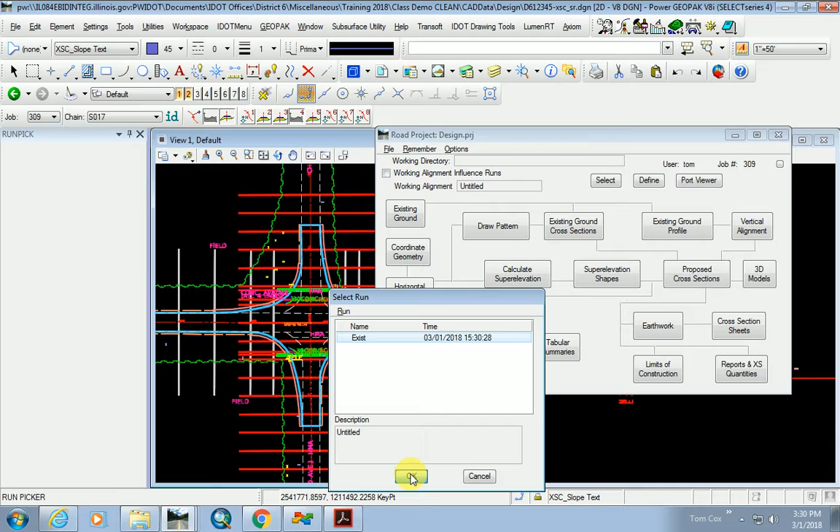So we're going to bring up Project Manager. Remember, we used existing before. This time we're going to say proposed, even though it's existing pavement. And then I'm going to name this existing. And all this, you're going to find everything's the same. It's asking you questions and you're giving it the answer.

And so where is your cross-section file located? So I'm just going to point to my mainline cross-section file. This tolerance, that would probably be fine. We were told at one point in time to switch that to 0.01. I always do. I assume it would probably still work with 0.1 though.

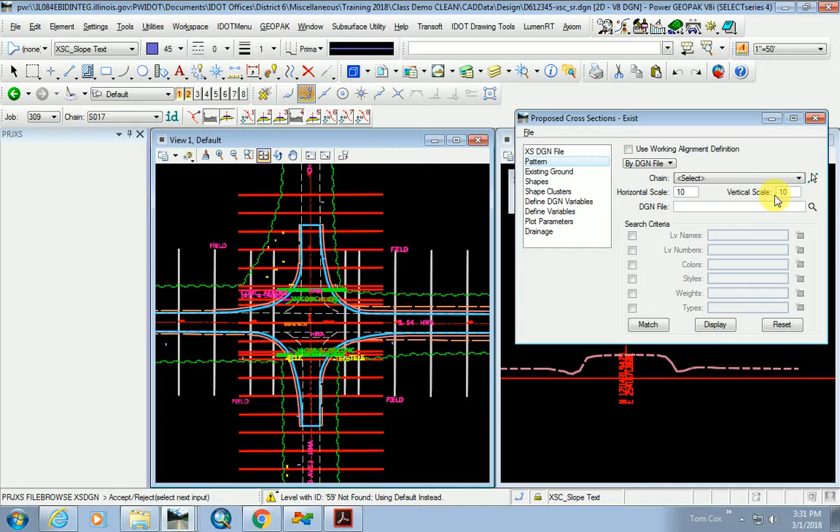Okay, pattern. Select my chain. Give it that 1-to-1 ratio. Path out to where the pattern lines are located in the geolines file. Toggle a few of these search criteria. Hit match. I match up my pattern lines. Next is existing ground.

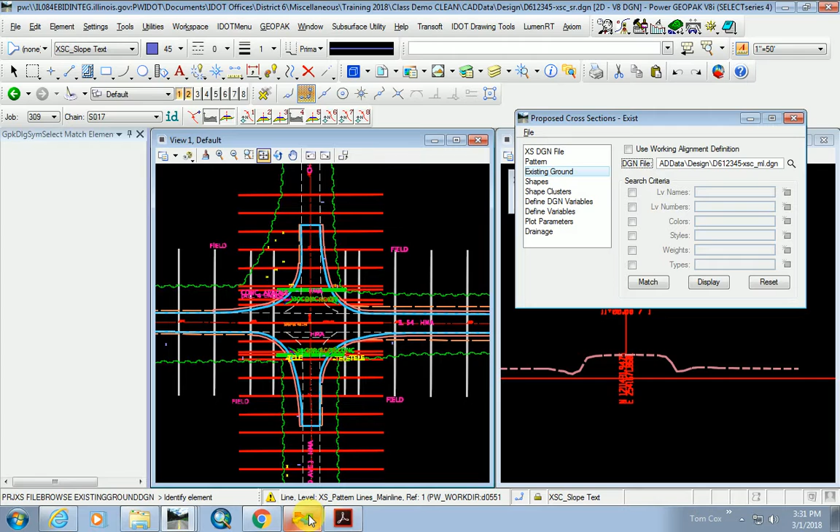Okay. I'm going to path out to my cross-section file. Am I sitting in that? No, let me jump into that file. Mainline. And it just needs to know what level I placed my existing ground on when I processed the existing cross-sections. Okay, so I'm going to toggle a few of these, hit match.

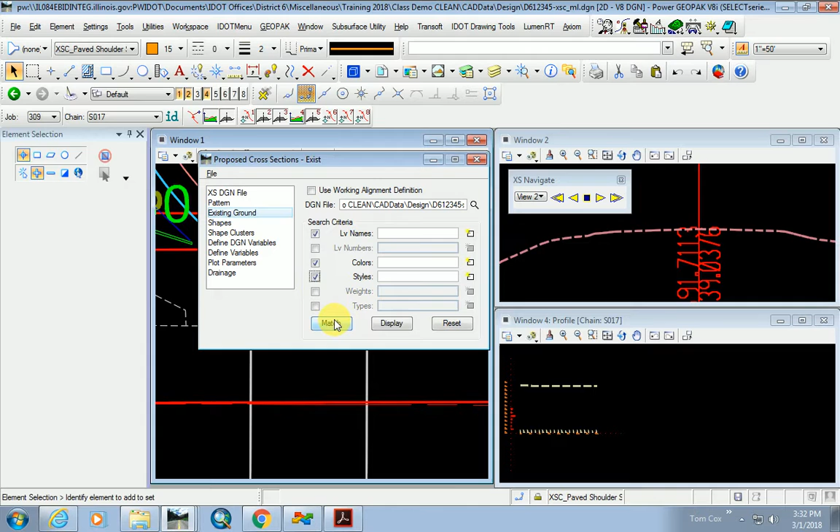And then I'm going to get to shapes. Now we'll talk about proposed shapes later. Shapes are what determines what the cross slope of the pavement is going to be. So Geopak will actually calculate, if you have curves, your super elevation and your transition. And then the way it communicates it back is through what appears to be a shape. It looks like a MicroStation shape, but it has cross slope information built into it and elevations.

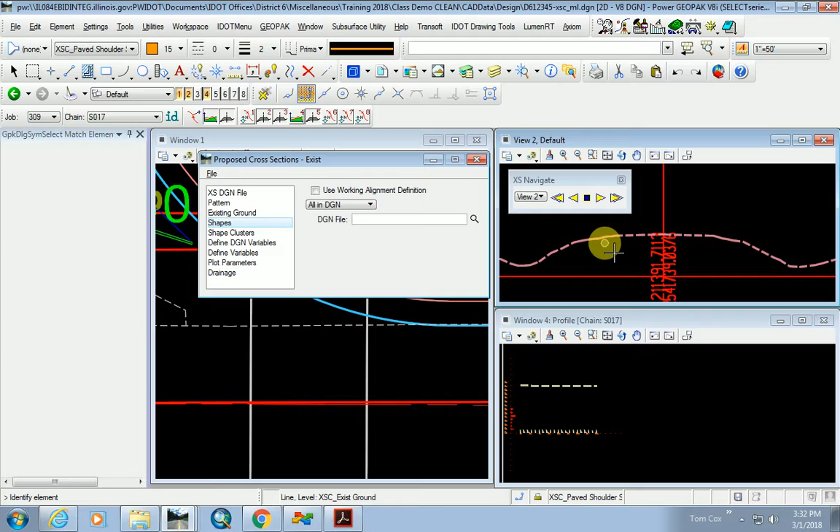But for this particular purpose, you know what we're doing here. We're drafting in the existing pavement automatically. So there are no shapes for that. So we're going to say shapeless. And then these shape clusters, again, we don't have shapes, but we're still going to be able to use this dialog. And we're going to say, there's my chain, there's my profile.

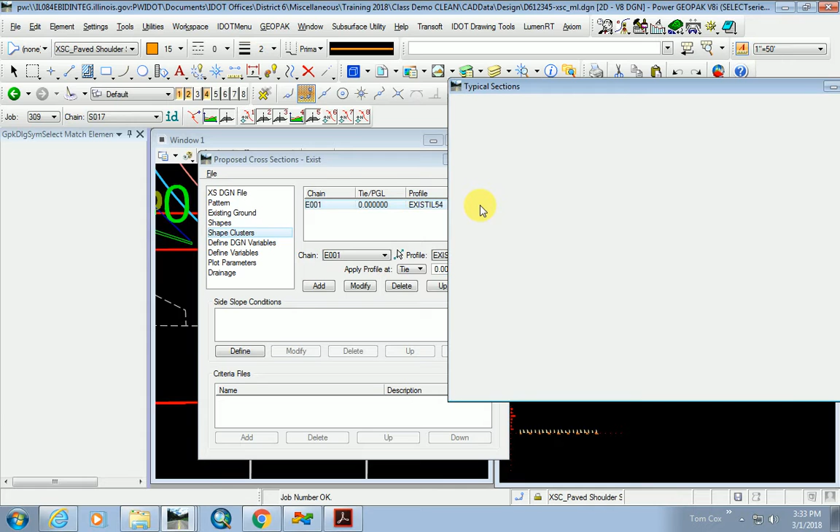And then I'm going to add this in. I'm going to select it. And I'm going to hit this typical button off to the right. And what this is doing for us, it replaced what I just mentioned, criteria. And so what this is doing in the background, it uses a bunch of these text files that have like if-then statements in them. I should open one and show you how they're written. It basically tells the computer how to draw.

It would say, okay, start off, go to the profile grade line. Go out horizontally 12 feet at a particular cross slope. Or go to the plan view file, look to see if there's any edge of pavement tagged. If there is, draw horizontally to that line, but use a cross slope of 1.5% or something like this. So there are all these text files for pavement, the ditch, the right-of-way line, I mean, shoulder, everything. It's a bunch of these criteria files.

Well, quite a few years ago now, this guy, his name's Chuck Lawson, he worked for Geopak at the time. Came from a consultant, super smart guy, loves this Geopak stuff, and he wrote for us like every possible scenario of the criteria. And then this allows us to take all that criteria that he wrote and put it into this typical section generator, and it makes it very, very easy for us to deal with criteria.

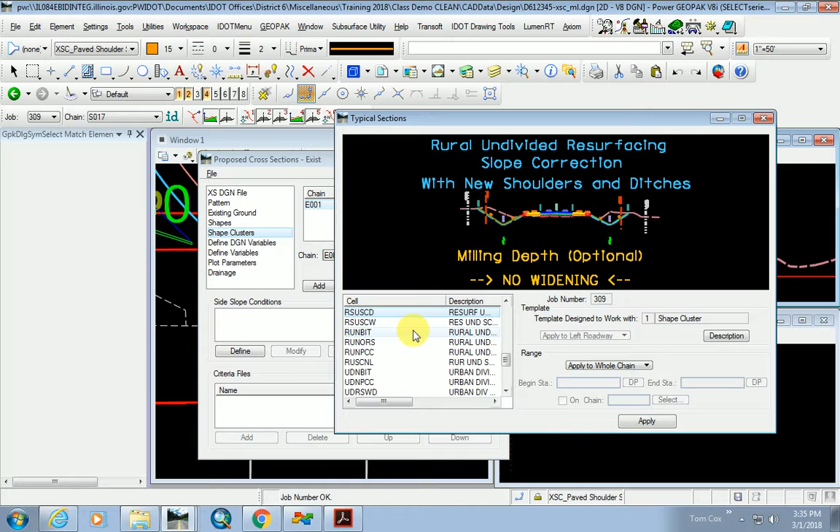So that's kind of the background. That's how things are working. Nowadays, you really don't need to know that much about criteria. All you really need to know is how to use this typical section generator. And so what you need to do is toggle through these typical sections, and you find one that best matches your situation.

Maybe I'm going to get pavement cores, and later I'm going to come back and tweak my existing ground to make it exactly what the thickness is, especially if I'm doing some work to that pavement. It might be more critical or not. It just depends on the type of the proposed work as to how critical the drafting of my existing pavement needs to be.

If you don't know what the thickness is, and usually it varies a little bit, by default we usually just use 1 foot on cross sections. 12 inches is very common. I think if you were to do your research, which you should be doing anyway, you're assigned a project, you look up all the old microfilm, and you look at the last job, you see if they did a good job on the typical sections, and you look to see what the total pavement thickness is. And you might be able to plug that number in.

Or if it appears to you they did not do a very good job on the last set of jobs, it might be advantageous for you to go back a few more, because a roadway was built and rehabbed many times since the 1930s, maybe 4 or 5 times probably. And so you can find multiple sets of old plans, and by that kind of figure out what the pavement structure is made up of.

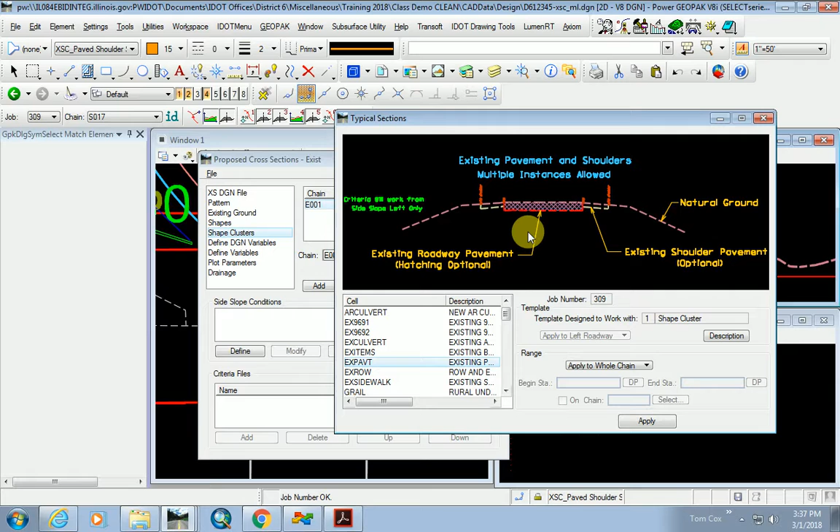So ultimately, oftentimes you end up just using this very generic one, though. So let's go ahead and use this one or the 969 one, depending on your situation. I'm just going to use this, and I'm going to hit apply. And then I'm going to drop down, and I need to answer some questions. It seems a little redundant, but you have to do this.

Where is your cross-section file located? And so we select that, and then we hit the modify button. See how it changed up there? Where is your topo file located?

And we were the first DOT that Chuck, this is actually very, very good, and it's lasted a long time, but we just met with Chuck, the same guy who wrote this criteria in 2001. He helped us develop our environment for modeling, so he's into modeling now. But he said we were the first DOT, and so he thinks that this is not that great.

It's pretty good. It's not bad, but apparently as he went along, before he got into modeling, he kind of mastered the creation of what we're doing here. You'll see that it is a little bit redundant, but it's worth the time because it's going to automate the drafting for you. It would save you a ton of time in the long run.

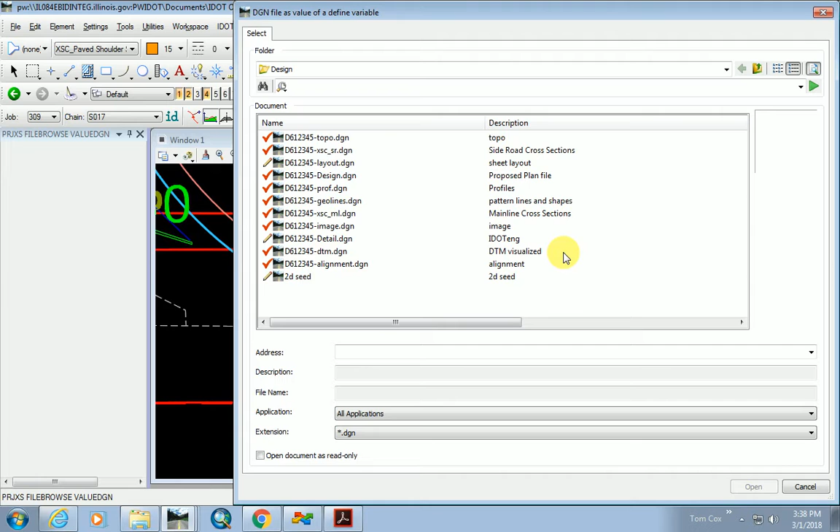Okay, so proposed plan, that's in our design file. Modify. Where's your right-of-way located? Remember, we decided not to bring that in. We left it in Andy's folder. Now it's going to be looking for that right-of-way line, so we might want to check to make sure that it's tagged. It can't just be drawn out there. Remember, we drew with the D&C manager, and so the right-of-way line has to be drawn with that as well. I think he uses that, though, I'm pretty sure.

Yeah, modify. Okay, GEOPAK lines, that's the geo lines. I'm not quite sure why it's asking me this yet, because it really doesn't need this information for the existing. I'm not going to do anything with that. Then I go down to the redefinable variables.

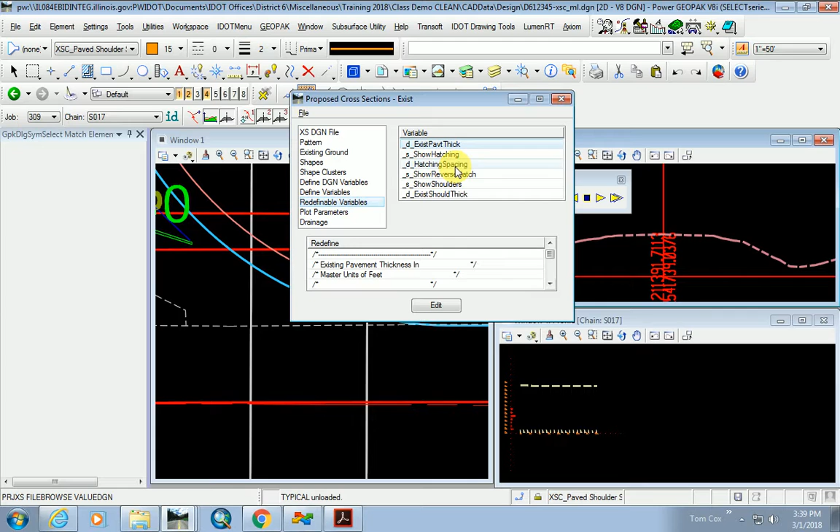And you can kind of see a little snippet of an extremely long written criteria. It's just showing us one or two little lines out of it, this if-then statement. And what it's doing, it's like TurboTax.

It's really filling out a tax form for you, but you don't see that tax form. It asks you, hey, did anything change in your life this year? And that's kind of what this is. It's kind of like that.

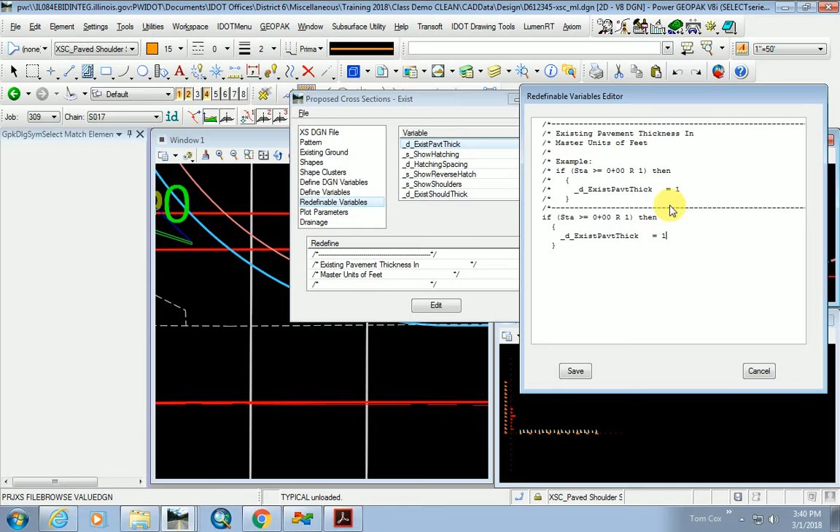So we'll go with 1 foot on the existing pavement. Hatching. So are you removing the pavement? Because if you are, you're probably going to want to cross-hatch it. By default, it's yes, but we're not removing any pavement on the main line. So we're going to change that to no. Hatching spacing doesn't matter because we're not using it.

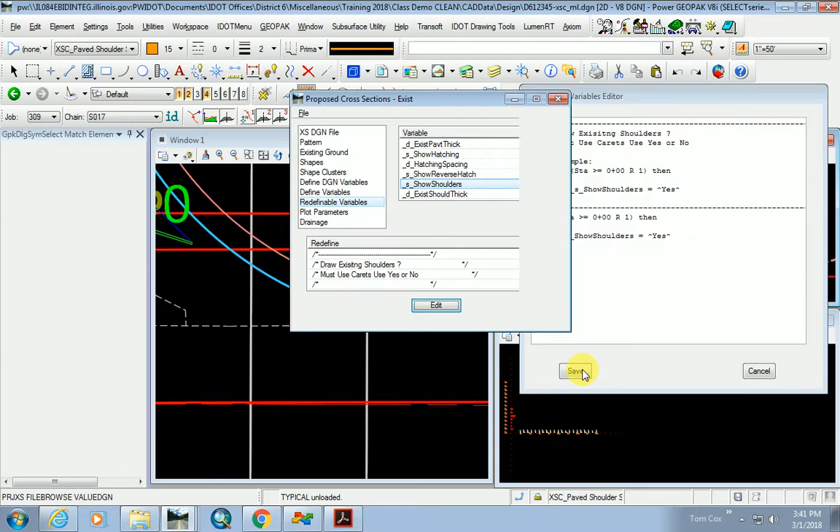Okay. Do you want to show the shoulders? Yes or no? And by default, I think it says yes. Yeah. What is your existing shoulder thickness? Again, look up old plans. This is 6 inches. Yours might be more. And it's referring to paved shoulder, not ag shoulder thickness, just only paved shoulder, whether it be, well, it's mostly HMA, but it could be concrete.

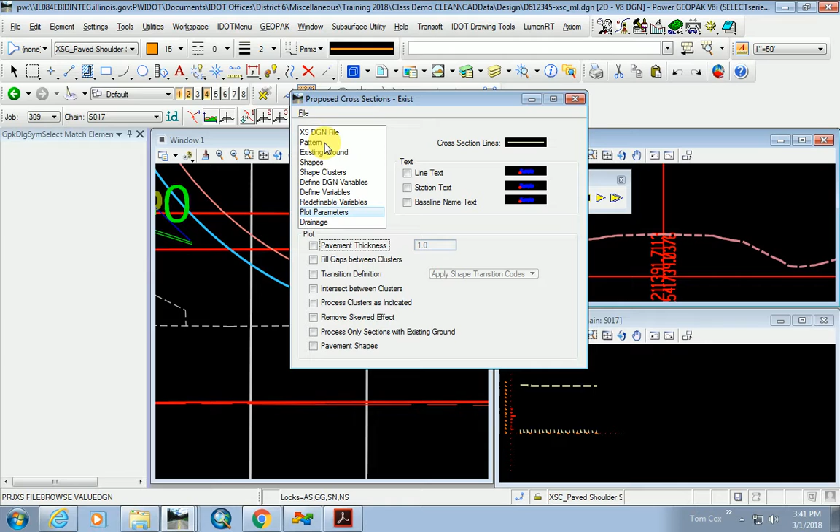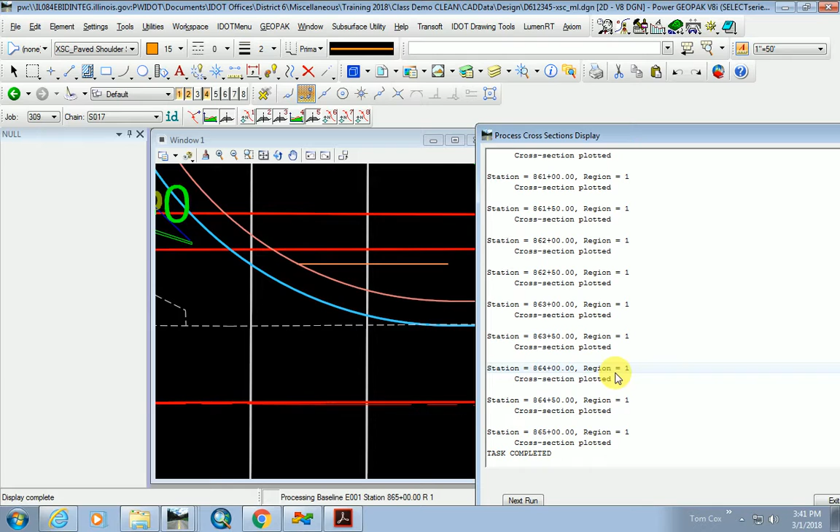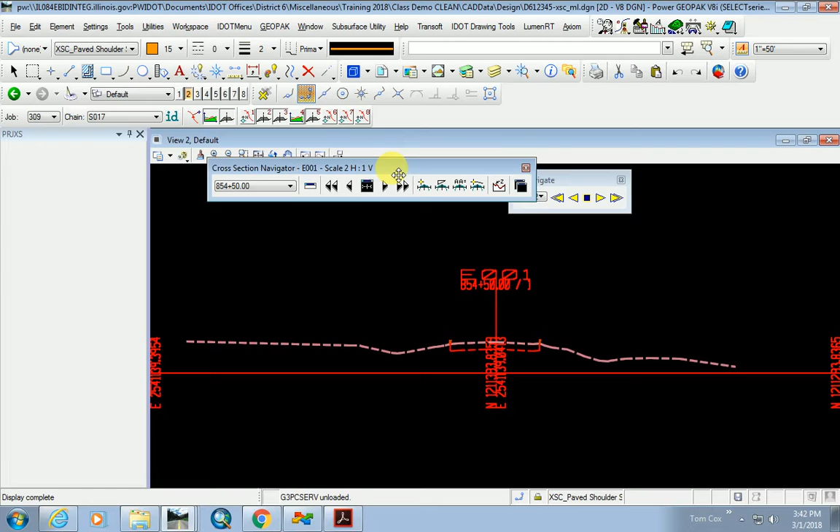And for these purposes, I don't think we need to turn on any of these. Okay, so then we do a save settings, and we're ready to process this. So we hit run. And so let's see, let's look at our cross sections. All right. So yeah, see, it took a little bit of time to set that up, but now, let's see, let's go to the other navigator. But here's what it did for us.

It went out and it found the existing edge of pavement, because in that topo file, again, the D&C manager was used and it tagged it as existing pavement. So where it's drawn there, it's not just drawing 12 foot, 13 foot or whatever. For each cross section, it's actually finding these elements in the design file and then drawing to them. So it's very accurate.

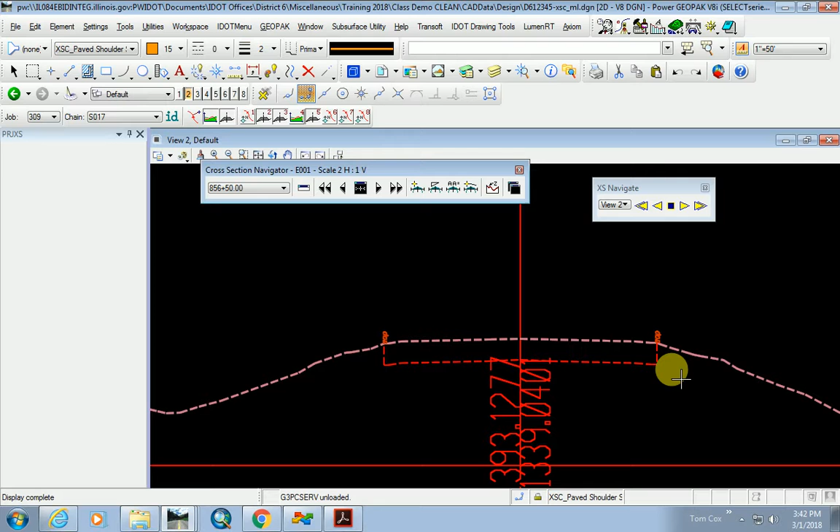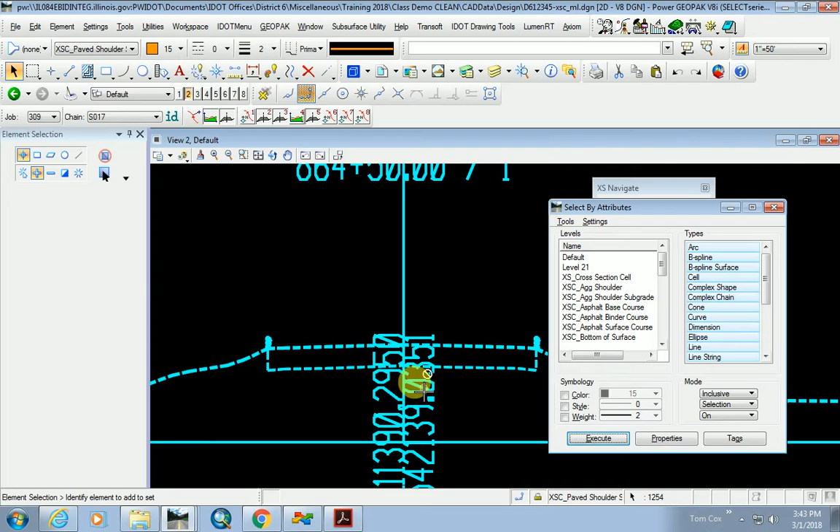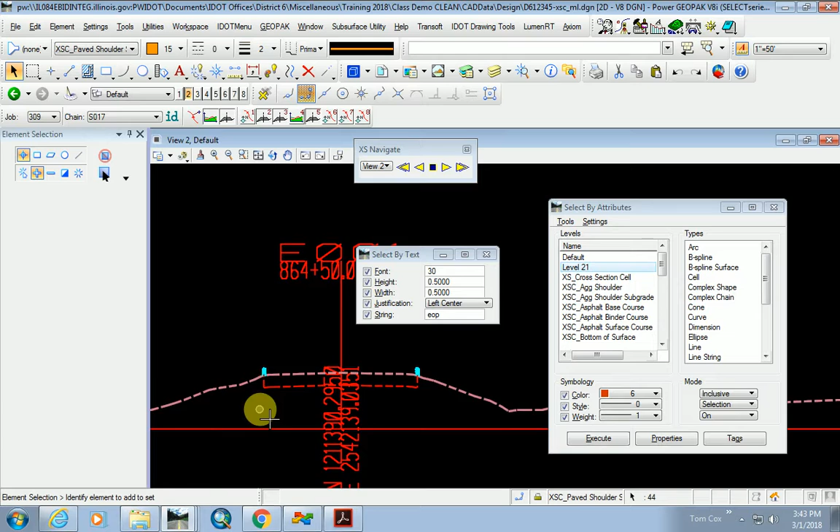And it puts this little EOP out there. I really haven't found that to be too useful. I usually get rid of it. And so I'm going to do a select by attributes just so I can quickly, oops, I don't want to do that. Why? What did I do? Oh, let's see. There. So all those little EOPs were selected, so now I can delete them.

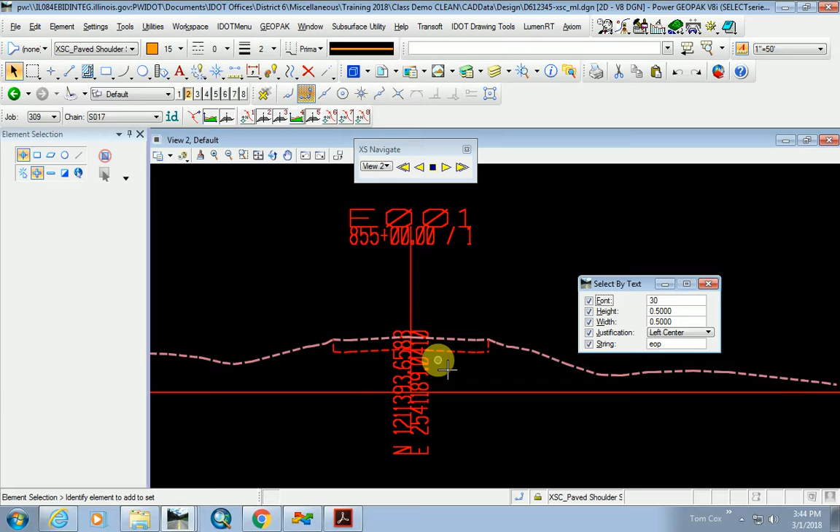Okay. So now we've got the existing. So next we're going to automate the process of drafting proposed cross sections. Oftentimes it takes a couple runs. You don't usually get it perfect the first time, and so you hit process. You might have to go in and make a little change, process change. You go back and forth a couple times, and when you do that, you don't want to lose the existing.

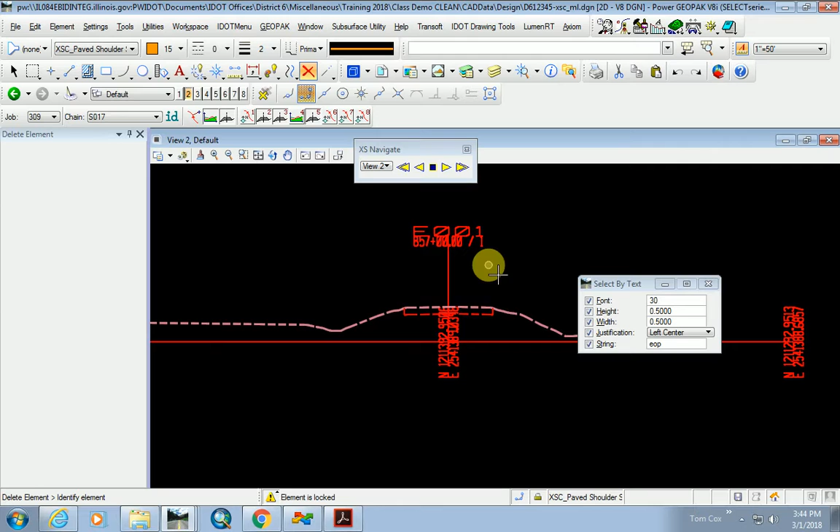And so what you need to do is select it all. Lock it down. Yeah. So select it all, edit, lock. And then we can't accidentally delete. Well, we don't have to worry about deleting anything now because it's locked. See, I can try to delete it, but it won't. I'd have to go back and unlock it before it allows me to delete anything. Okay, so now I guess we'll go do the side road real quick.

So we're obviously not going to finish the entire job today. It's going to take a few more hours to completely get through the job, setting up plan profile sheets and all that.

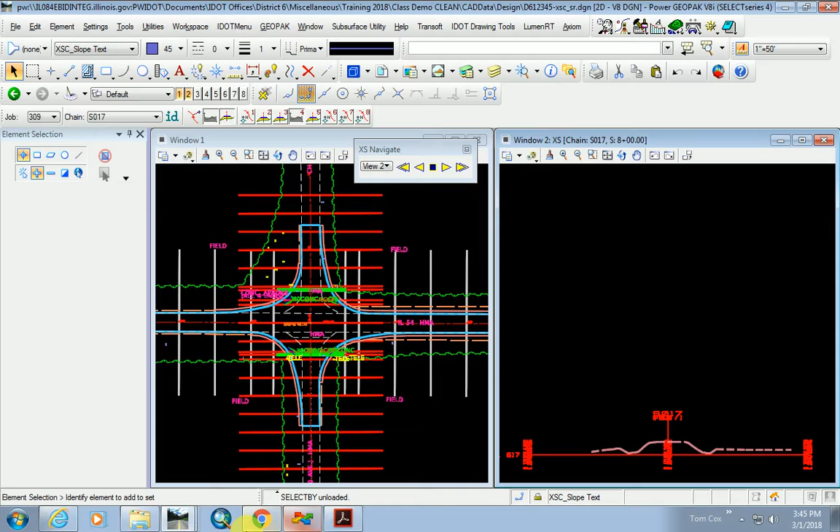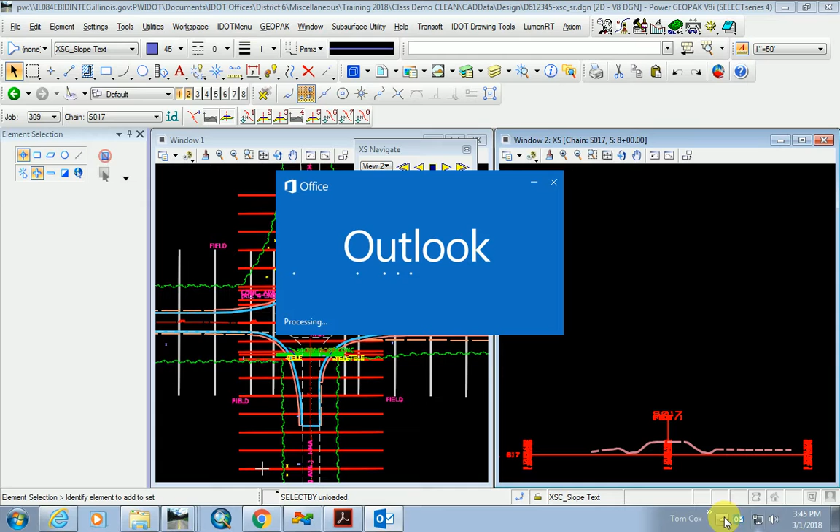So when do you guys want to continue? Do you want to do it tomorrow or next week, or what do you guys have? What do you have going on tomorrow? Tomorrow is fine. We'll still remember something. Okay. We'll survive the weekend. Yeah. Okay, so when we finish up here, I'll check the calendar to make sure nobody has this room for tomorrow, and if so, we'll just leave it set up. If somebody has it, then yeah, we may have to do it next week. But well, here, let me check real quick while we're here. Let me pause the recording. Control. There we go.

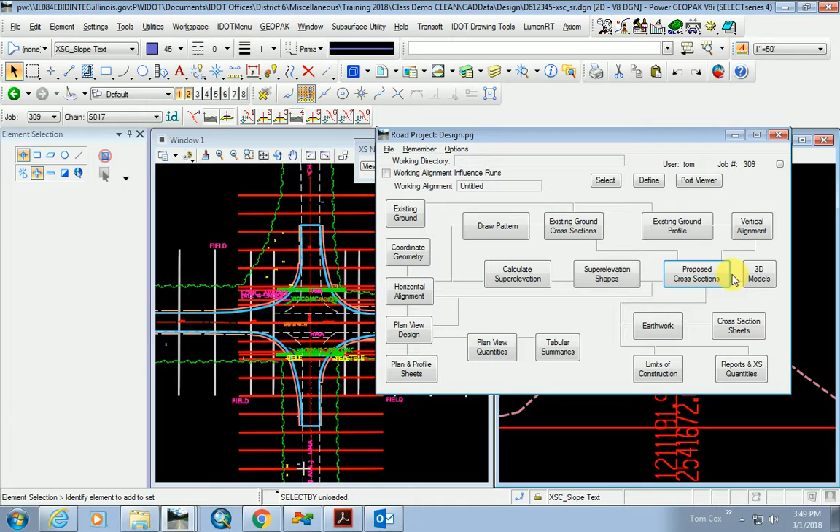Okay, so we just processed existing for the main line. Now we're going to do the same thing for the side road. Again, we go back to proposed cross sections. I shouldn't have to key everything in this time necessarily. I could probably just use the same run. It's mostly the same information, but just reset, match up to the side road.

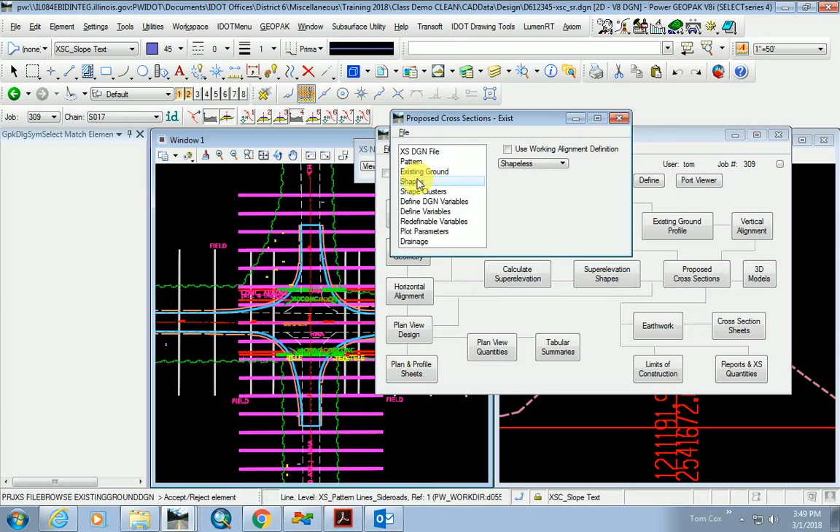Existing ground. That's a different file. That's the side road file. Actually, that's all going to be the same. The level is. It's shapeless. I think I can switch the profile and just modify it. And change this maybe to, hopefully. Did that not like it? What did that say?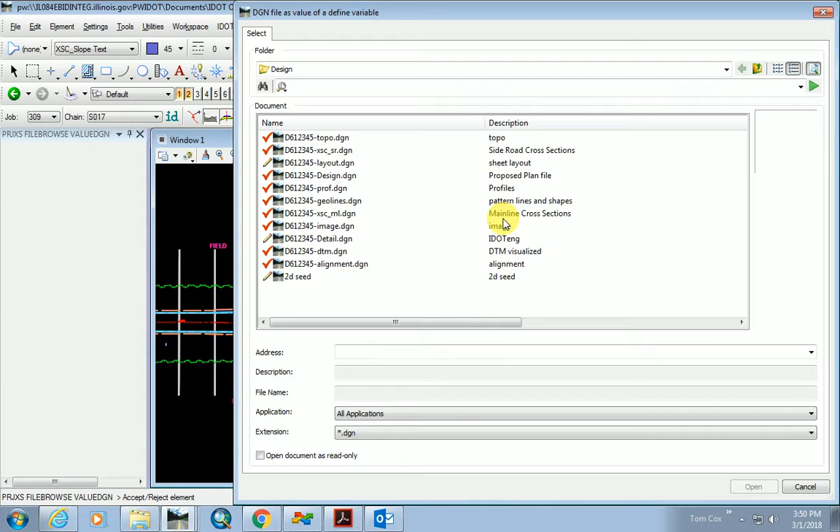Oh, I guess select it. Change it here and modify. Oh. This may or may not work. We'll see. And most of this information, again, will be the same, so I'll just change what we have to change. I think everything else is going to be the same.

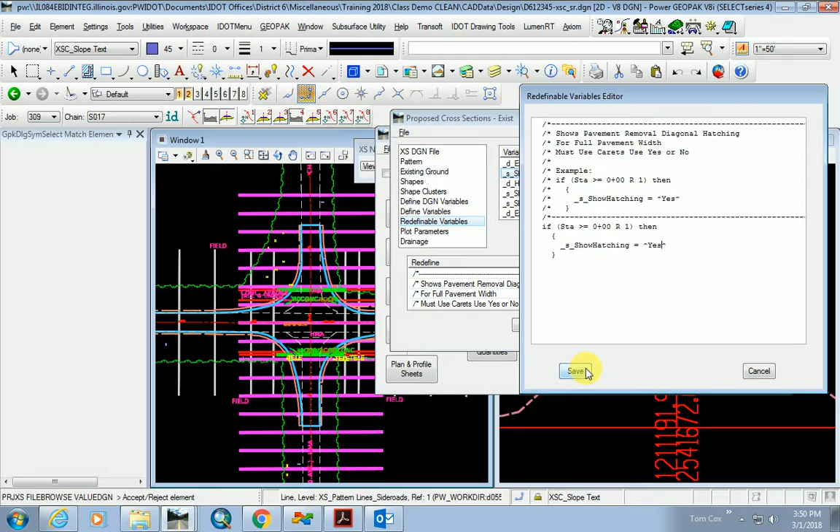Now, on the side road, we are going to be removing the pavement. So let's say yes on the side road version. And hatch spacing, I don't know, that might be a little tight. Okay, we'll do save settings. Hopefully this works. It's probably more reliable if I would have started a new run, but I think this should work.

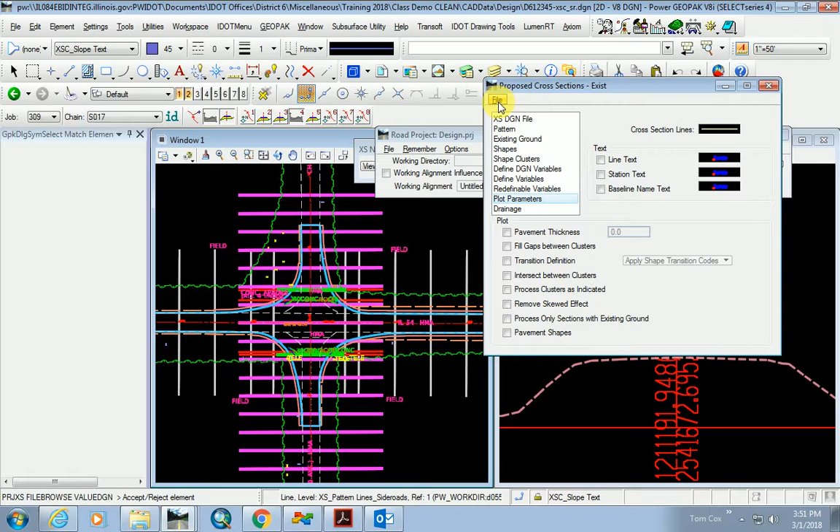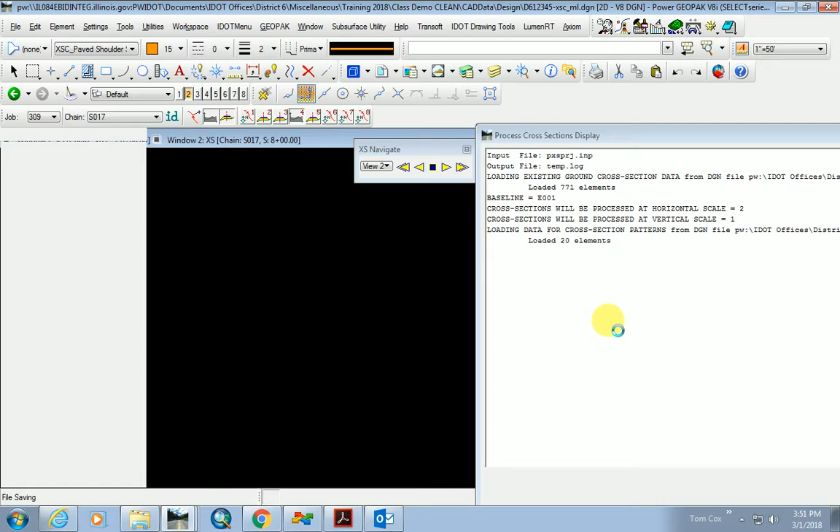Oh no, you see that it chose the wrong baseline up at the top. Somewhere I was still pointing to the old baseline, I think. Although it looks like it may have worked. Let's see. Now it switched us to the main line cross section. Yeah, I might just have to, it's usually best to process that run separately.

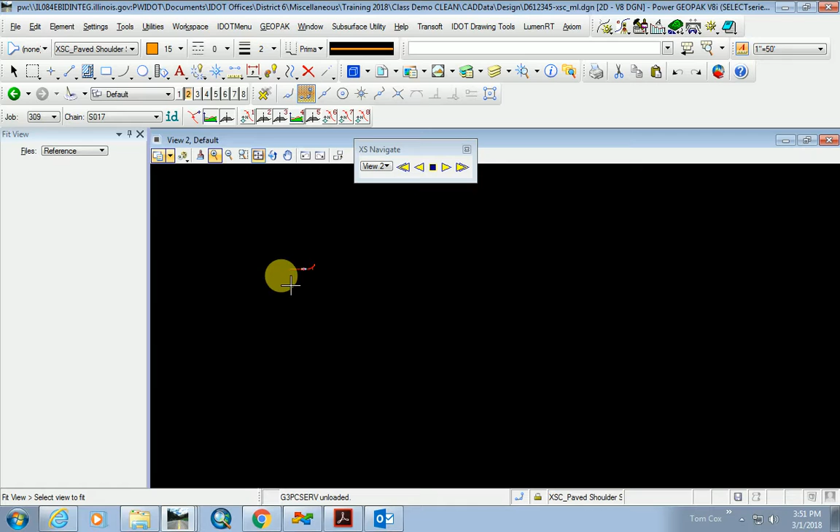Weird, back to chain control. Is the active chain control out there around there? Oh, there it is. Okay. I just want to take a quick look to make sure it didn't mess up our... Wow, no, looks okay. Let's go back to the side road though.

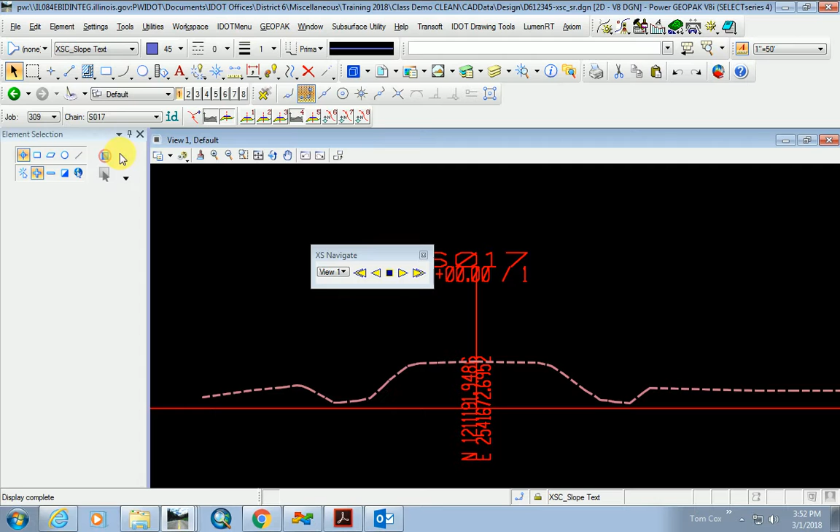Okay, let's do this again. Yeah, I probably shouldn't just, I tried to take the easy way out and it didn't like it, so. Yeah, see what happens when you cut corners? Okay, so let's just start a new run. I hate to start a new run, but it seems like there's always one little thing you miss or something, so. So I'm just going to say new, and

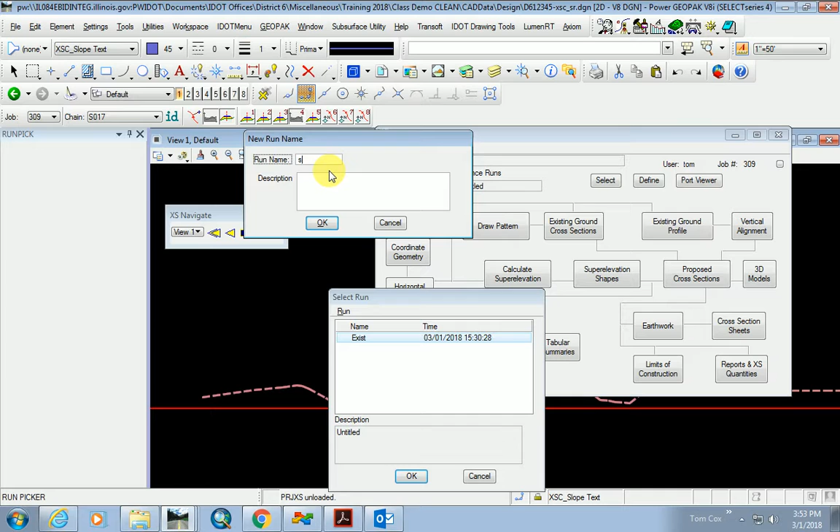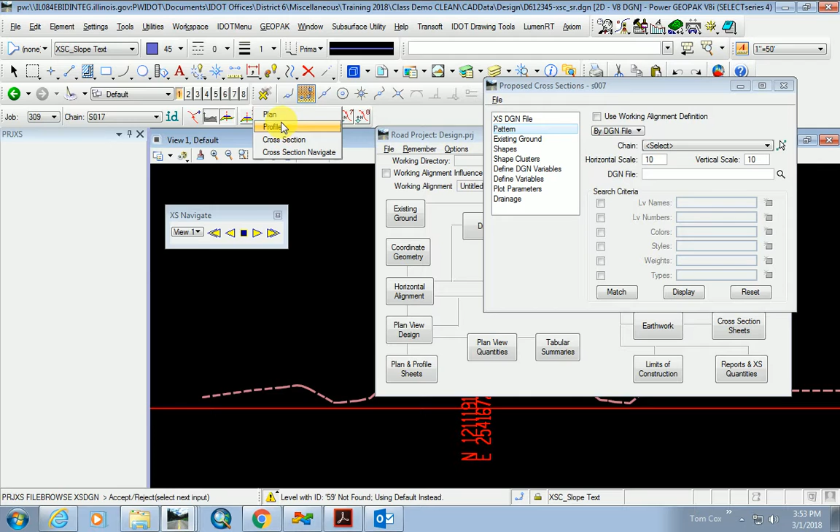okay, so the cross-section file is a side road. We change the tolerance to 0.01. We will grab our pattern lines. We want to make sure we get this selected, 2:1 ratio. Point to the geolines file. Toggle a couple attributes to make it unique. We match it. Existing ground.

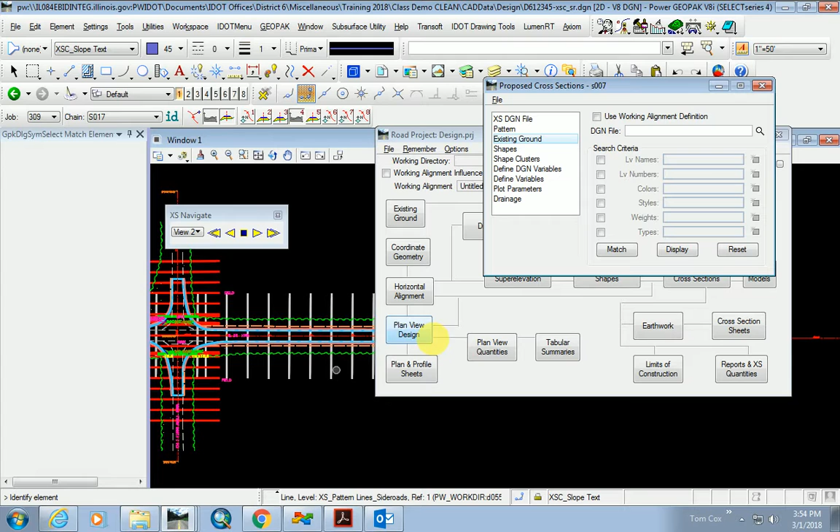So I'm going to go back to my cross section so I can just select it also. So I'm going to point to my side road cross section file. Toggle a couple attributes, match it, shapes, we're shapeless, clusters, that's correct. So I'm going to add, there's my chain and profile. I select the cluster, I hit typical. I select which typical section I want to use.

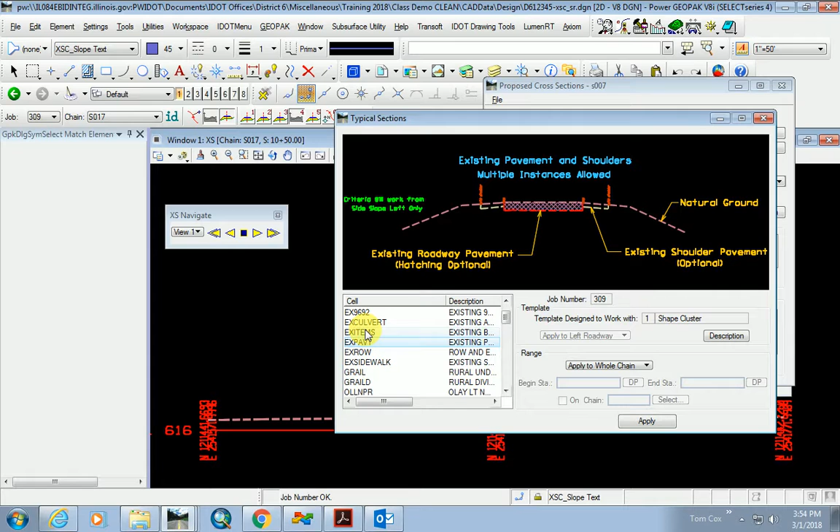I apply it, it copies down the criteria files, which are these .x files, the criteria files. And then I answer those same questions over again. Where is your cross-section file? Topo. Proposed plan is design. I don't think right-of-way is going to matter because we're not really processing right-of-way here, I think that's going to be processed in our proposed run, but since it's asking.

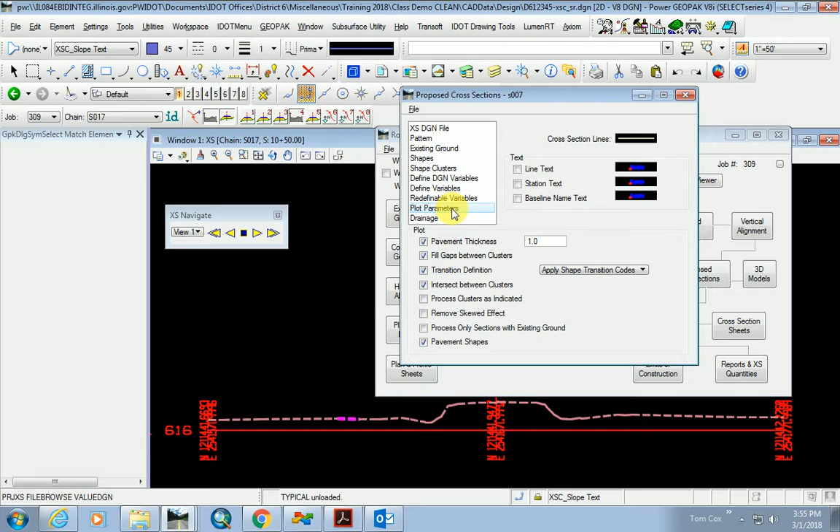And geolines file, that's important. And probably none of the remainder. I'll turn these off. Existing paved thickness, default's 1 foot, I already know. Yeah, so we want that. So yeah, we'll probably just go with the defaults on the rest of it. I'm going to save the settings, and now it should work.

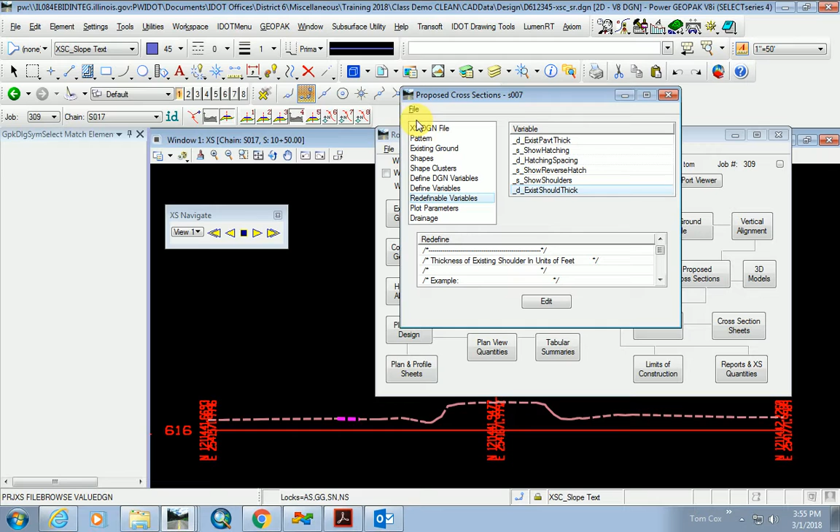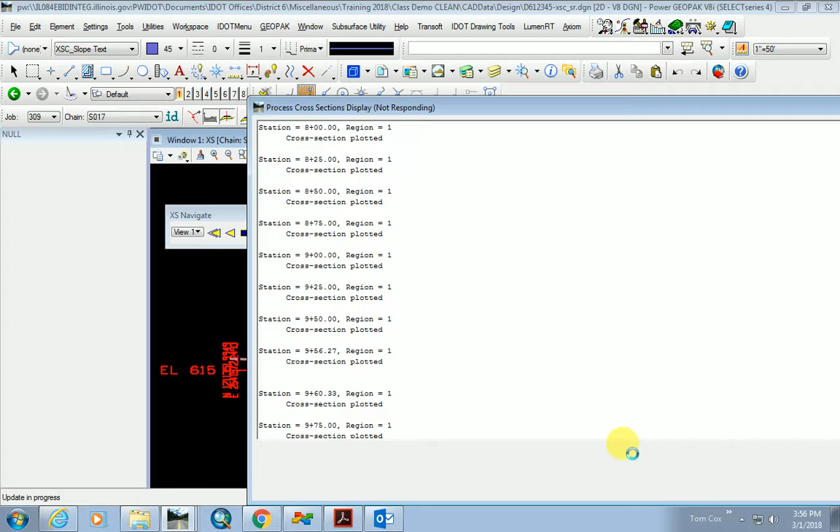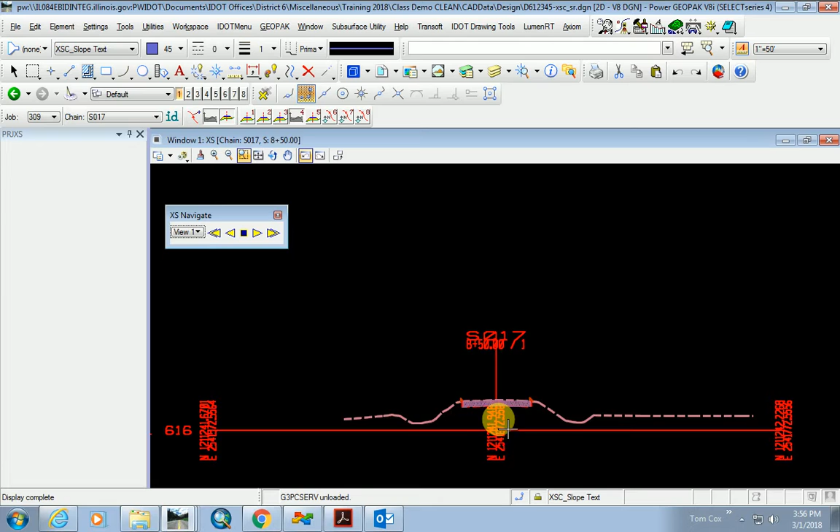Oh yeah, I probably should have changed the spacing, but that's okay. 0.5 is kind of a lot, but that'll be okay. So let's see, let's resync this up. The first one. We can take a look at our cross sections, and the width isn't going to match up to the existing pavement. I think we'd have to look in the plan view to see what's up with that.

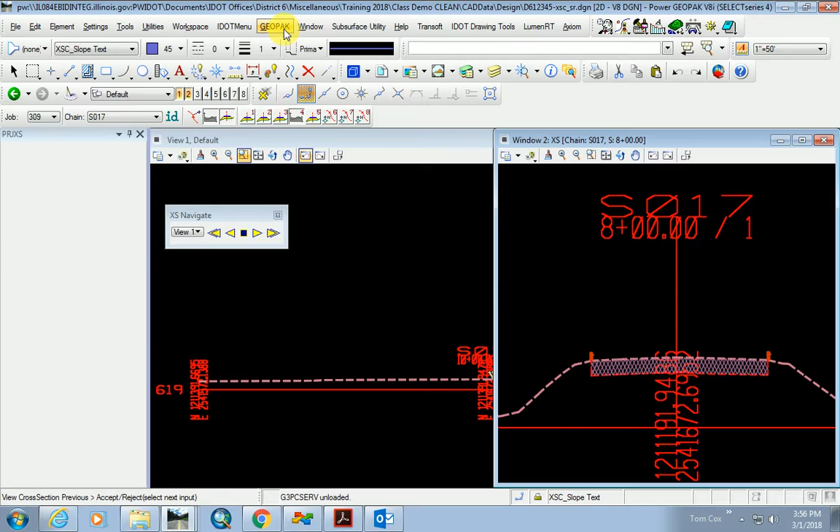So, you know, it's possible there's going to be some kind of problem on 1 or 2 or something, and you might have to manually draft it in. You can usually figure out what the problem is, though. It may or may not be worth rerunning. If it's just the 1, it's probably not worth it. But let's take a quick look at it in the plan view, see where it's at.

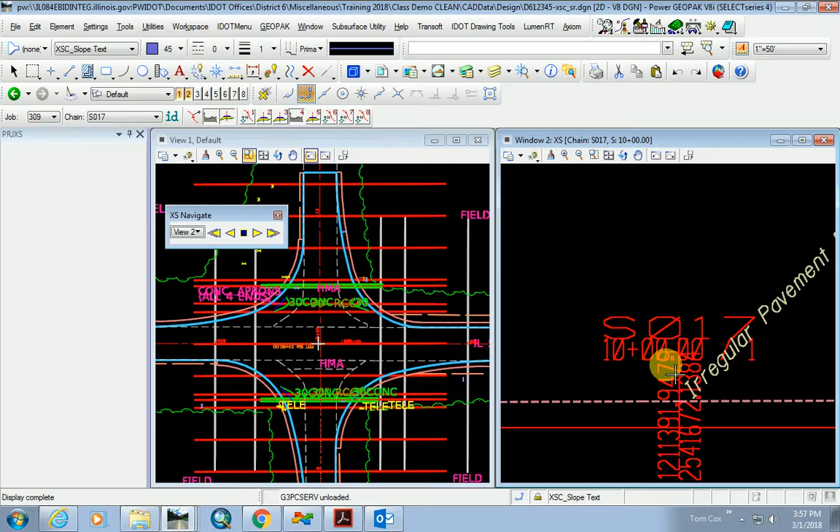Okay, so we'll toggle through to find out where it didn't work. Oh, there. Yeah. See, for this to work, it has to intersect two edges of pavement. Because see, with that ID, when I ID edge of pavement, it's not looking for that. I guess I'd have to bring out the D&C manager, and I could ID it, and you'd see that it's set to say edge of pavement.

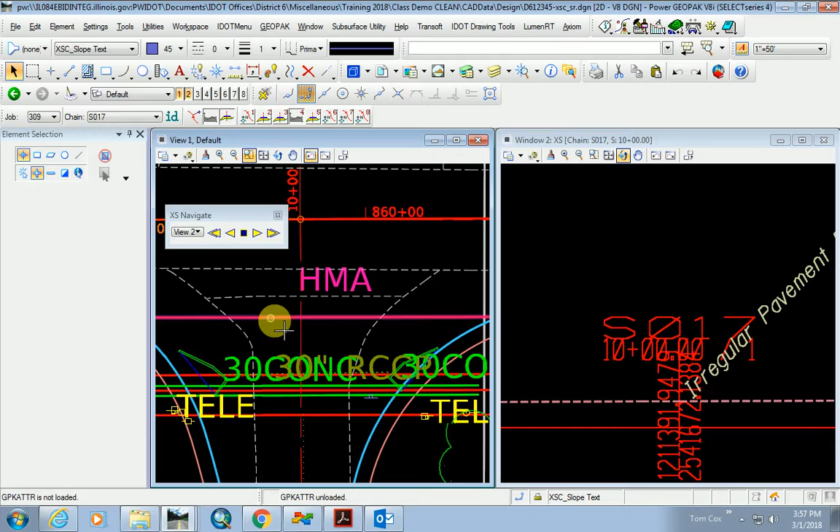And here it didn't have an edge of pavement defined. But really, we didn't even need that cross section right there anyway. In fact, I think I'm probably just going to delete it. And we'll delete that pattern line later. So let's see, were the rest of them okay then?

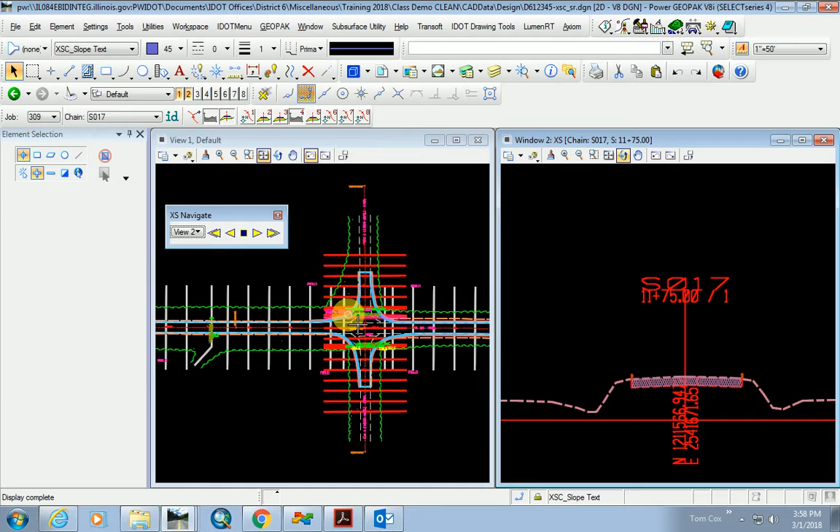Probably the only thing is that I had a few cross sections before I got into my proposed. And so, of course, I would not want to remove that pavement. So I'd need to go in and just use regular MicroStation commands to delete.

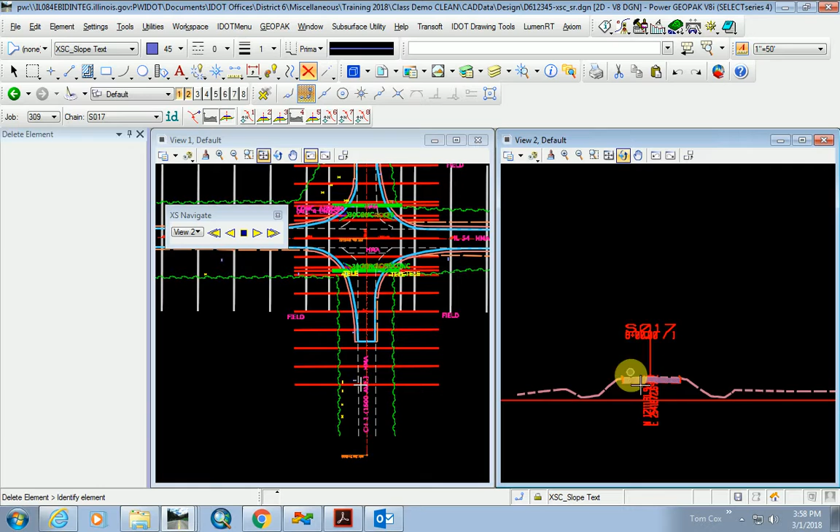Okay, so that is the existing surface and existing pavement. I guess on this job they didn't have any HMA shoulders, so we said yes to shoulders, but you can see from the topo that there are no paved shoulders. There's only ag shoulders. We look around, yeah, see. Yeah, they're gonna propose it. No, there was no existing HMA.

Now, one thing, I had this job for a while, and when Cloyd and I worked together, he worked on this intersection a bit. And were we together, Cloyd, when we went out to the field and stopped by, and the utility company, this is like a high power transmission line. It's not just a little distribution line. It's more on a larger scale, I think they call these high power transmission lines, right?

So they're out there replacing it, and I couldn't tell where they were replacing it, and I knew we were going to be getting into it, and I was like, oh, shoot. I guess we should have told them. Well, fortunately, we had the survey crew go back out, and they picked them up, and it turned out that where they replaced them, thank goodness, was out far enough. So we got lucky on that one.

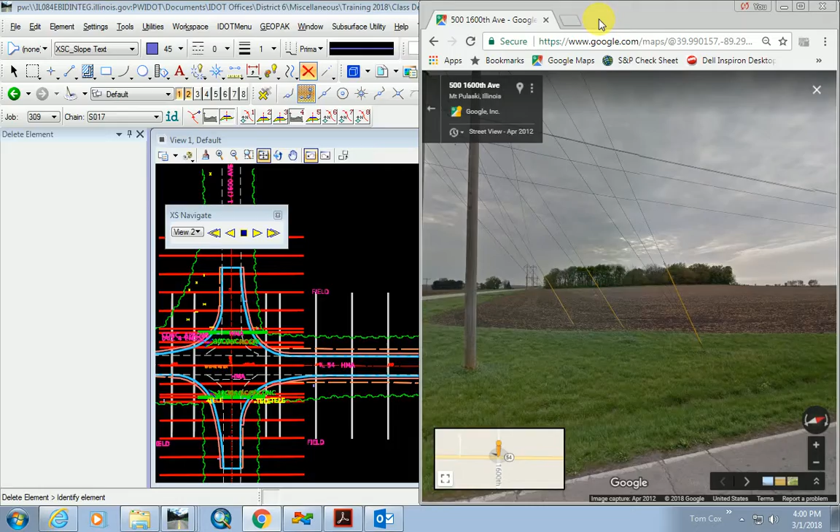But you can see from a utility standpoint that obviously this utility is going to need to be relocated. But that's minor. Just one of the smaller poles. I think I saw some fiber running through here too. Right there. And so that's another thing, another reason why you need to tie CAD into that.

When you're first getting started on a project, even though you're not really doing anything with plans yet, you're developing plans. You think, well, I don't need plan sheets, but we do need to send the utility company sheets to mark up. Not all the utility companies are picking up the utilities by GPS and that sort of thing. And so we're now emailing PDFs of the plan sheets that you need to give Dana in project support. So you'll need to develop plan sheets really early on in the process, if nothing else, just for that purpose of getting utility markups.

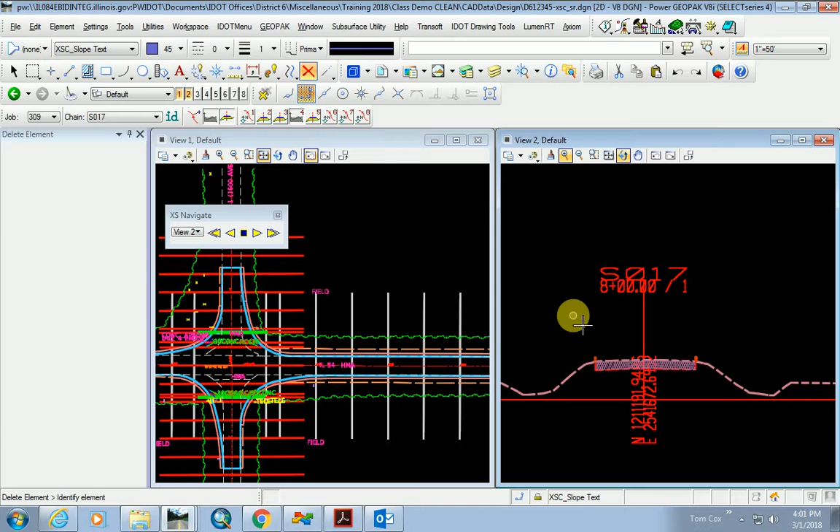Okay, 4 o'clock. Should we get going on proposed cross sections? We'll give it a shot. Usually at the end of the day, we're getting a little burned out, but what do you think? I think it's a good starting point, maybe. Yeah, because I can tell. Propose in the morning. Yeah, let's do that. How do you get it done? I don't know. It's up to you guys. Because some people probably get off at 3:30 anyway, normally, right? I do. I didn't know they were going to have this class. I just came to work and they said, come to the class. So I would have come at 8 o'clock, so I'll go with the flow. Oh, shoot. Yeah, that's okay. You're a trooper.